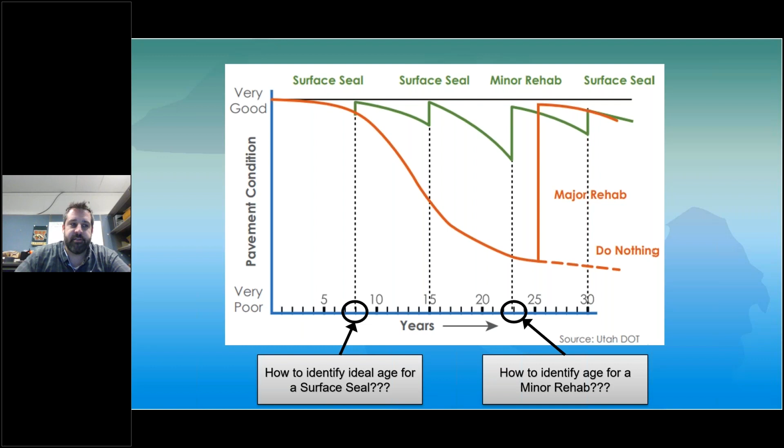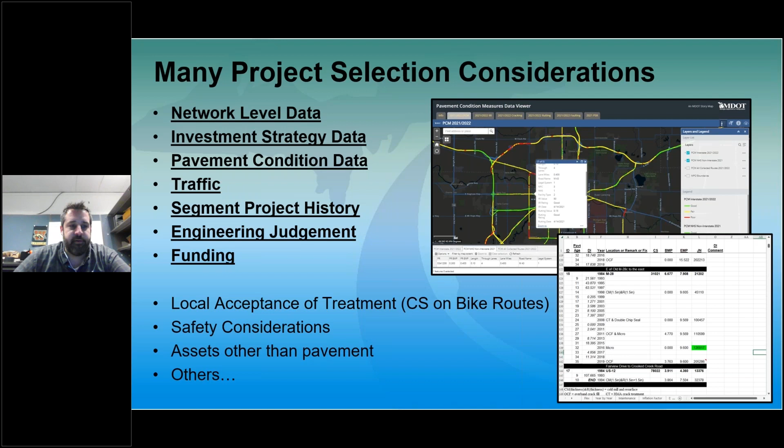So I wanted to start at a high level, where does MDOT use the data, and a breakdown on the steps that we utilize it in. The first level on top is the network level. We use a software called Road Quality Forecasting System, and that software helps us determine where our network is currently. We break it down with deterioration models and how the pavements perform and how they deteriorate. Currently we're doing a 1-year deterioration on our remaining service life, which I'll get into in a second. Then at the network level is where our program projects are, and kind of our strategies going forward. So that top level uses a lot of high level data.

And then the preventive maintenance program, where we're doing pavement seals and what we call functional enhancements, which is basically single course overlays or concrete patching, that type of work.

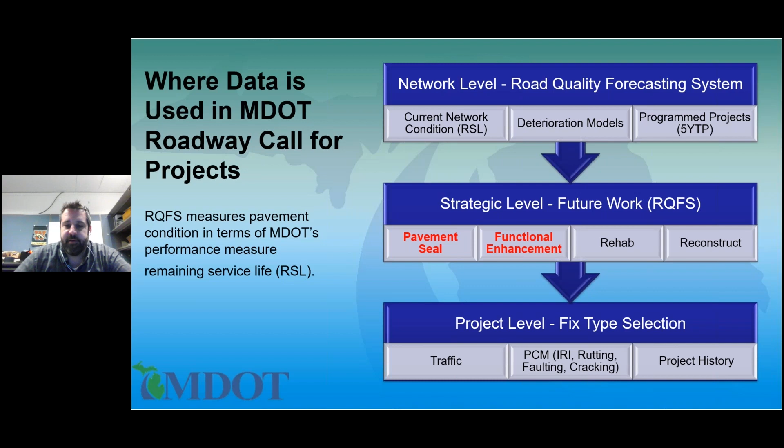So from there, the next rung of the data and where we use it is at the project level. That's where we're actually determining the fix, taking into consideration other data types too, such as traffic, PCM data, and project history.

Just to look at what we get from the network level data from our road quality forecast system, we basically get a look at our network at a high level, and good, fair, and poor roads, MDOT. So we utilize RSL for determining the status of our roads, whether they're good, fair, or poor.

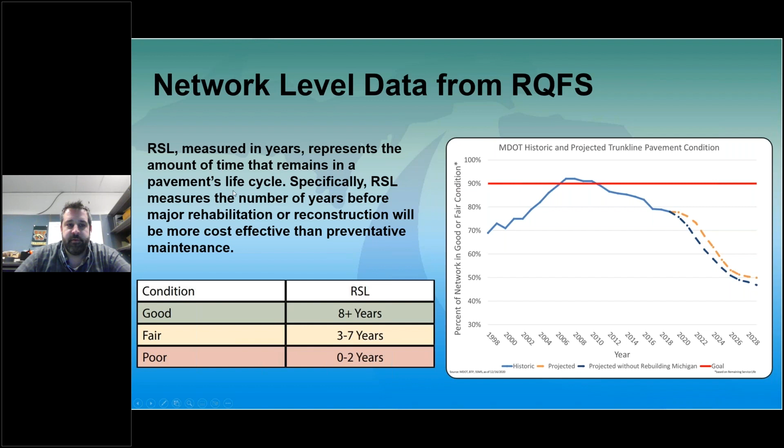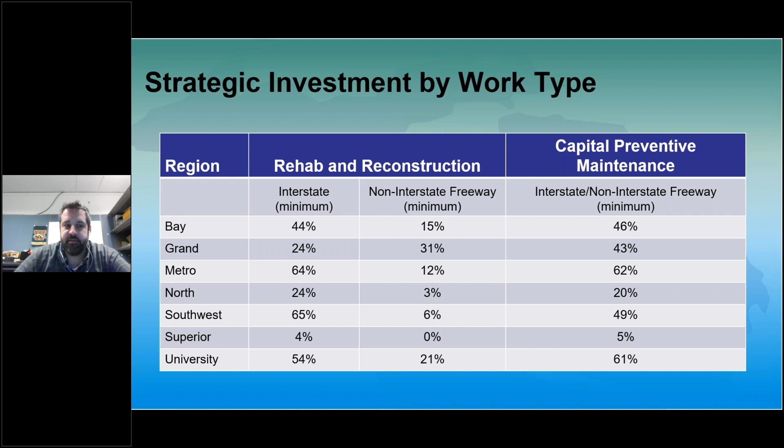The next level down was the strategic investment. So from RQFS, we determine strategies for investment type - how much money should we put from each of the templates into certain regions and roadway segments. It helps us break down where to focus the funds at a high level.

And then from there, the next strategic thing is to look at the individual templates. This is monies that are a breakdown of the budget for capital preventive maintenance, and we determine which category to focus our money towards: pavement sealing, functional enhancements, and some discretionary funds.

So we're trying to move the needle, so to speak, on the condition of the roadway by directing our regions to invest in certain work types.

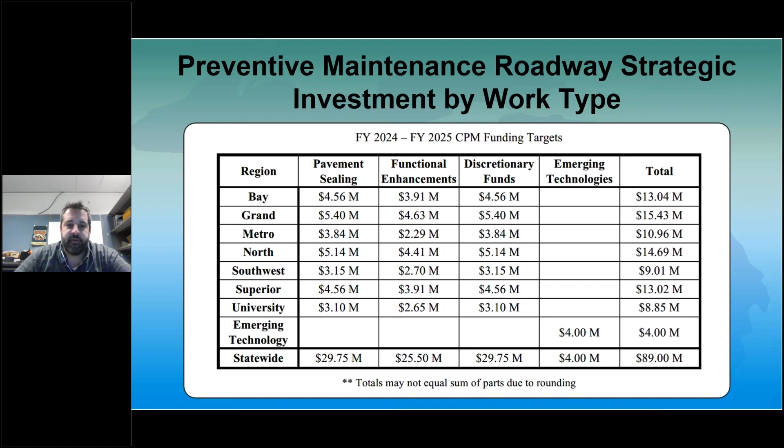At the project level, we're getting down to that low level, right at the job level, and that's determining the fix. So we have a CPM manual, MDOT - it's a really great manual. It goes into detail on all the fix types we utilize in the program.

Like I said, remaining service life is one of the big ones. Distress index, which is a sunset index that quantifies the level of surface distress that exists on a pavement section into a composite score, we utilize that. As of 2018, that is sunset, so we're developing a new index currently.

And we also use the standard PCM data: international roughness index, IRI, rut depth, and of course traffic data, project history, and a big data point, in my opinion, is engineering experience to determine project selection.

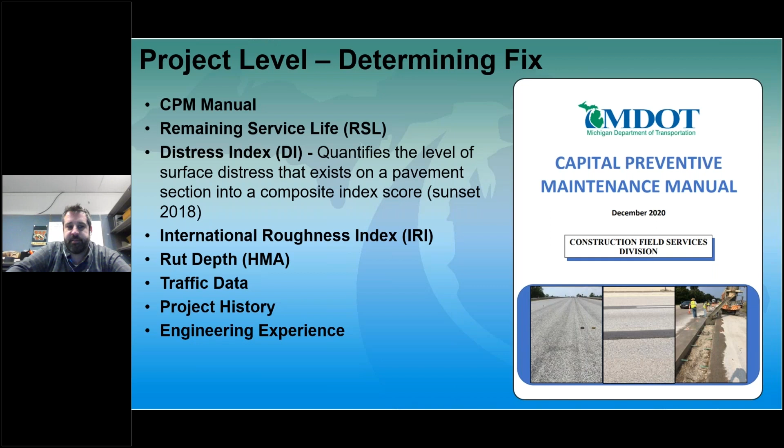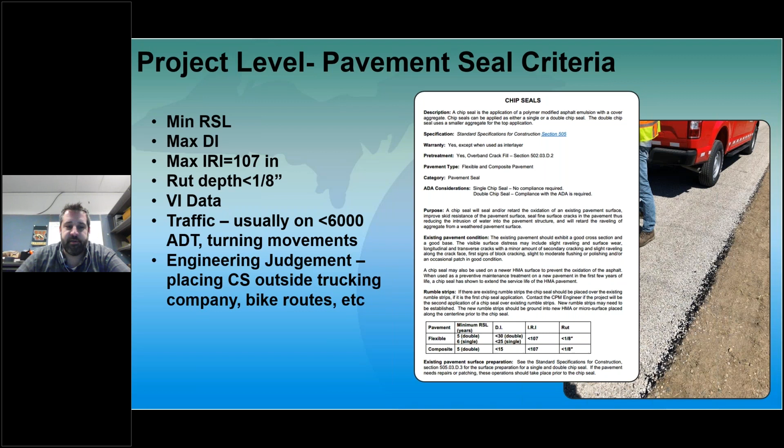There's also a lot of good write-ups in there on where we should focus it according to the ADT levels, turning movements, that types of things, and engineering judgment, of course - limited turning movements, things like that.

The next project level use of data example I wanted to give is crack seal. I think this is a good one for MDOT specifically. We currently do region-wide crack sealing contracts, and we proactively seal many lane miles of our pavement every year. The CPM manual gives a breakdown of when to use the rout and seal versus overband method.

Basically, you can use cracking data for that and VI. There's also crack density criteria that we use for selecting routes that get the crack sealing. And then basically we say you need a remaining service life of 10 years - let's not crack seal old, neglected roads that are going to get a reconstruction soon, to better invest our dollars. So, similar to the chip seal, but getting right down to the nitty gritty of data utilization.

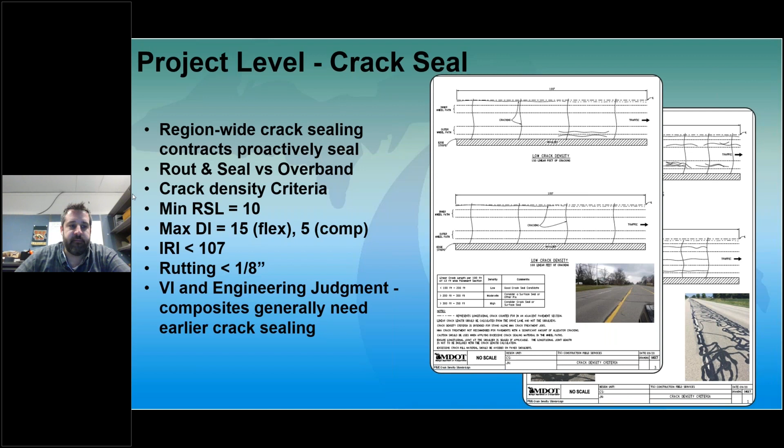And with that, that's all I have.

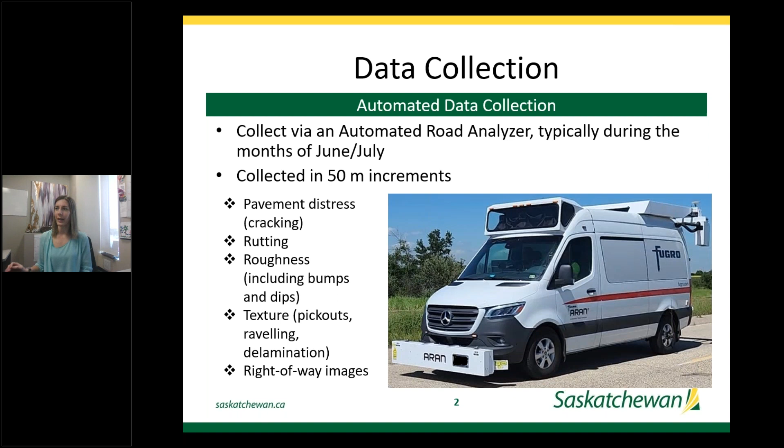Once we've collected all that data, it's time to start rolling it up into our pavement preservation program. We roll it up into 3 primary distresses. The first one is unique to Saskatchewan, we call it our surface condition indicator, or SCI, which basically looks at your crack density and severity and some of your pickouts. Then of course we have rutting, the maximum wheel path rut depth you might find on a road, and then our international roughness index, or IRI, to measure the ride quality.

When we're selecting projects, we look at all 3 of those, of course. We also look at traffic volumes, our maintenance costs, how the road's deteriorating, and then what budget we have and how much treatments are costing.

We have 3 different treatment programs that we spend money in. We have our light program, which is more of your chip seal coating or fog sealing, and those are triggered by SCI, so more based on cracking or pickouts. Medium program is more of your microsurfacing or your thin lift overlays, which are triggered by rutting. And then our heavy program, which is usually our resurfacing or rebuilding, primarily triggered by IRI, but it can be triggered by any of the 3 distresses.

We do have trigger points for each of the distresses for the good, fair, poor ratios. So depending on what treatment you're looking at, they have different treatment trigger points.

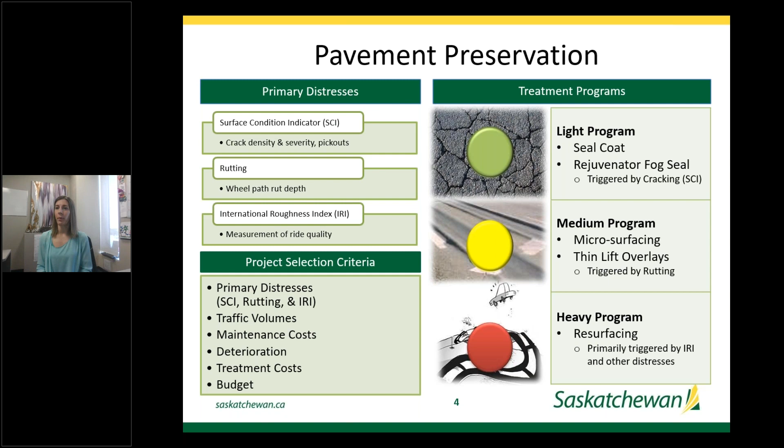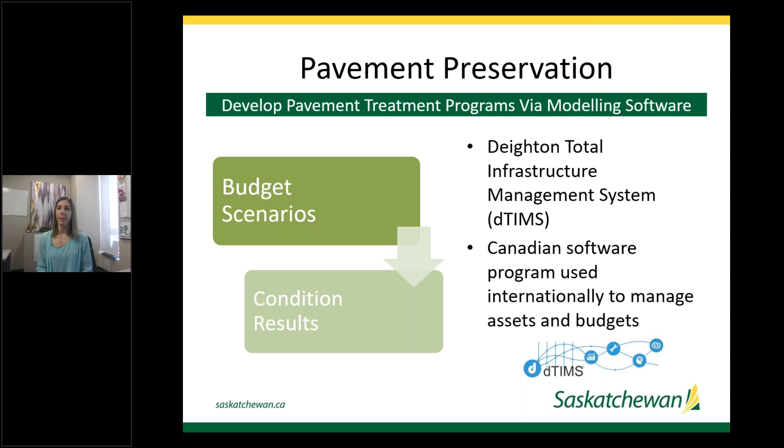To determine all of that, we actually use modeling software. Right now we're using Deighton Total Infrastructure Management System, or DTIMS, which is a Canadian software company that's actually used internationally to manage assets and budgets. Basically what you do is take your budget and say this is how much I have to spend in whichever category I have set up, and then it spits out a condition result and a construction program for me.

To go into that in a little more depth, you input all your information, your inventory, your traffic, all that great condition data that you just collected, how much treatments are costing, and your budget, of course. So you set up the model and what budget you want to look at.

Then the modeling software takes all that good data you just put in, and it optimizes based on the pavement condition index. That's something we've built internally here at the Ministry of Highways, and it looks at all your distresses, your cracking and your rutting primarily. We've built that based on our automated data collection. It's normally a visual assessment, but we've been trying to automate it just for this purpose, so it's something we've been working on lately.

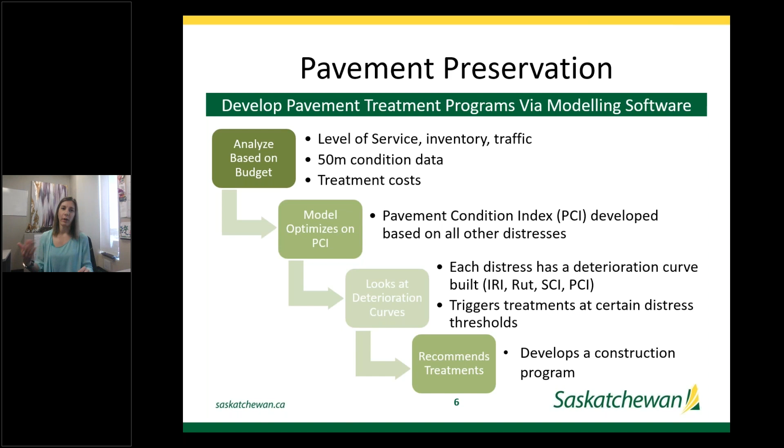Then it takes that optimization period that you've set up for your life cycle costing, and it looks at the deterioration curves for each of the different distresses. We've built some regression analysis for each of the distresses, IRI, rutting, and SCI, and then we've set up our different treatment trigger points. So as the network deteriorates in the model, it will trigger treatments and ultimately recommend a construction program. It will also show you how your network is deteriorating or improving based on that budget level and the treatments being triggered in the model, so you can analyze it in each of the different distress categories.

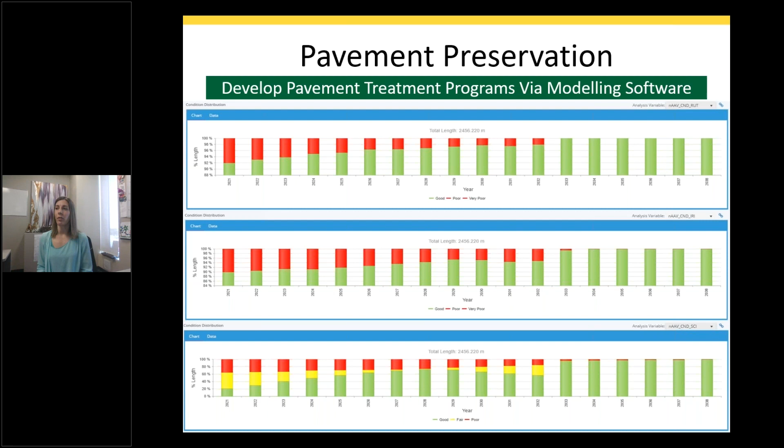So your rutting, your IRI, or your SCIs in this case. And then, as I mentioned, it does spit out a very comprehensive construction program telling you what year you should probably select a treatment, what treatment type, and where it should go.

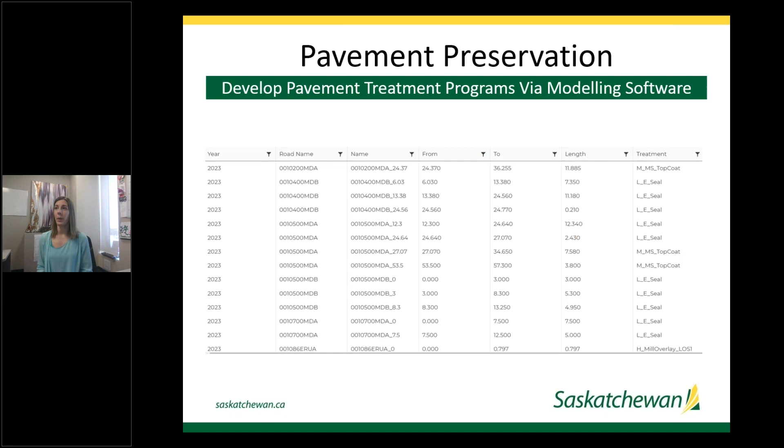You can adjust things as you go along, which of course you should do, and exercise some engineering judgment. So before we finalize our program, we do go out and verify things in the field to make sure that the modeling software is working correctly and that it's actually a treatment we would want to place in that location. And then we finalize our light, medium, and heavy programs based on the available budget.

We also have targets that we're trying to reach for each of our distresses on our different networks. So we compare what conditions are coming out with our targets, and maybe we just don't have enough funding to meet our targets, or maybe something needs to be adjusted in the model so we can better meet our targets. Depends on what the situation may be.

And once we've finalized our program, then we hand it over to our design group if something needs a design. And they also need condition data from us, so we do provide that to them, and that way they know how to design the road.

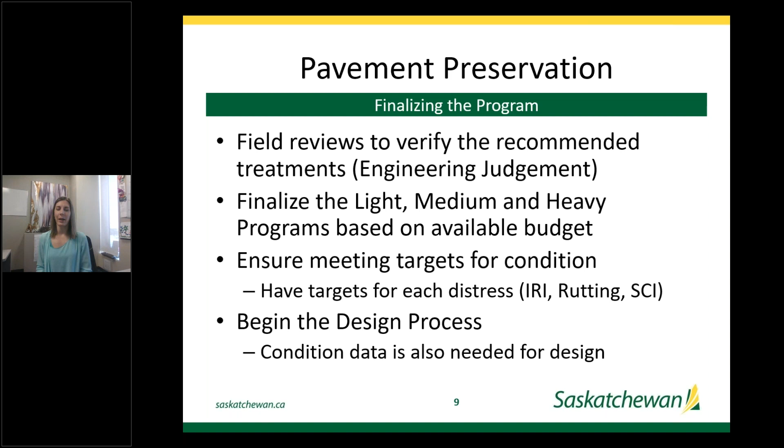It might be for something like rutting, the road needs to be designed for. Maybe they need to add something to address cracking, like rubber or fiber, to their design. So we do provide that to them to aid in their process as well.

As I mentioned, we do collect right-of-way imagery, and some of the future uses that we're looking into, and some folks in our ministry are getting interested in, is leveraging those right-of-way images to collect other assets. So things like light standards, power poles, signs, or line markings, because we are driving down the road and we see all these things. So you can build algorithms to flag some of these objects, but a lot of it right now is very manual to go through and assess.

So it may not be the most practical thing yet, but I think as time goes on and the technology advances, it's a possible additional data collection point that we can get.

So that's my presentation for now. I guess if there's any questions, we'll discuss them after the next presentation.

Good morning, everybody. My name is Chris Kuffner. I am with Hennepin County in Minnesota. I'm the Asset Management Division Manager. I've been with the county about 1.5 years and was asked to give the local perspective of a county in Minnesota and how we're using our asset management and pavement data, how we make decisions with our pavement preservation program. Prior to that, I had a 25-year career with the Minnesota Department of Transportation, and the most relevant position there was district pavement and materials engineer, responsible for the pavement management program in that particular district. So I'm going to talk a little bit about the Hennepin County Pavement Preservation Program and how we utilize the data.

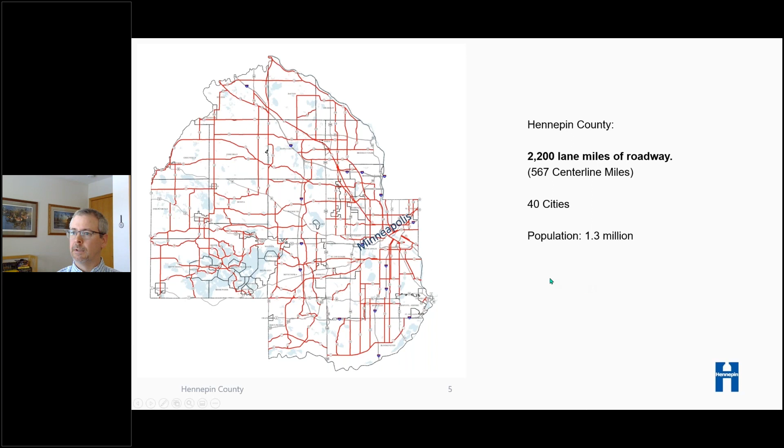So definitely some challenges in managing a program. And there are 87 counties in Minnesota, so this presentation probably isn't representative of all of them, as Hennepin County is the largest. And while any agency will say they don't have enough funding, Hennepin County has pretty good funding, in that we are able to afford and invest in our own data collection equipment.

And so we have our own profile equipment, and we run our roads every year. Of course, this is based off the International Roughness Index, but then that's a calculation to what's called a pavement surface rating, which has a 0 to 5 rating. This coincides with how the Minnesota DOT reports their smoothness as well, so we're somewhat apples to apples. Anything above 3 is going to be good, anything below 2 is going to be poor.

But then we also do a pavement condition index, where we have staff that go out and visually inspect all of those cracks and distresses, and ultimately plug that information into a program that results in a pavement condition index ranking from 0 to 100.

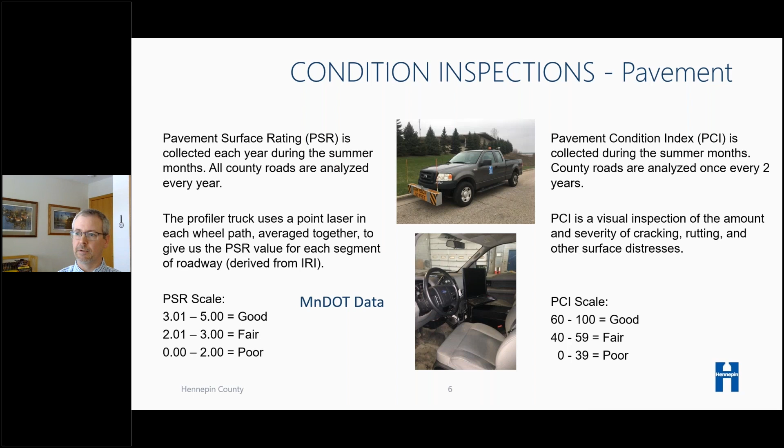For several years, the Minnesota DOT has been providing pavement data via their pavement management vans to all the counties in Minnesota, and they run that every other year. I'll show you in a bit, Hennepin County hasn't historically been using that, but I'm exploring ways to reduce redundancy and utilize similar information, and maybe improve safety for our staff that's been out there collecting it.

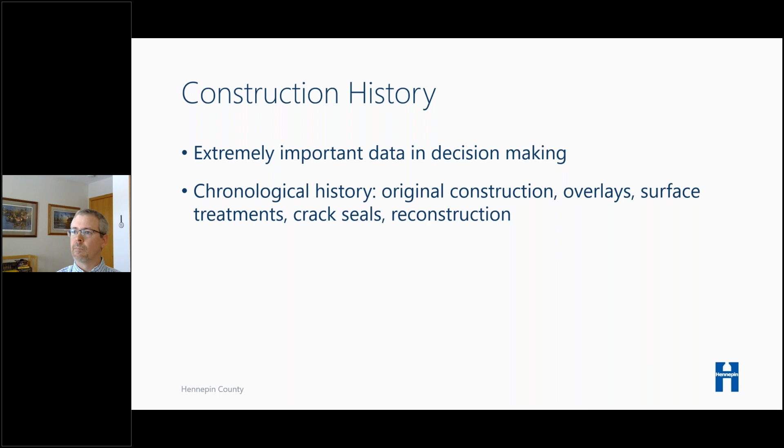Other data, like the other two I've mentioned, I think construction history is very important when considering your preservation program. It's one thing if you've built a new road, how you're going to treat that for pavement preservation, but if it's an older road with multiple overlays, you may have a different strategy. So we have all that history dating back to original construction and subsequent overlays, surface treatments, and up to including reconstruction.

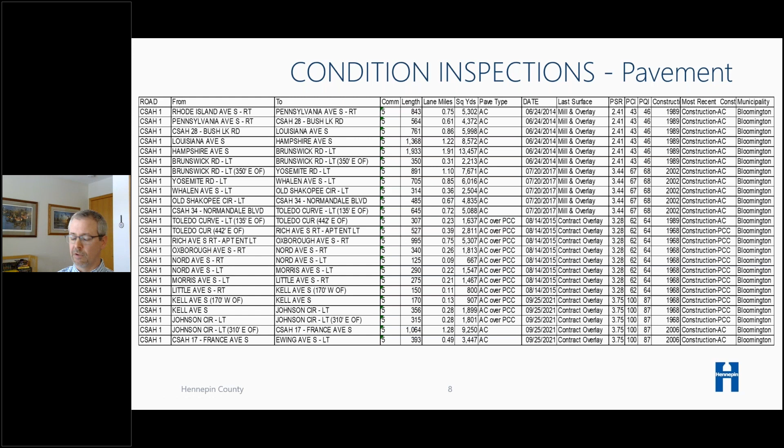One of the main problems for us right now is it's the same road, but the segments don't align—they're not the same start and stop point. And we're not tied to a linear referencing system quite yet. So we're trying to get into the 21st century on some of our data.

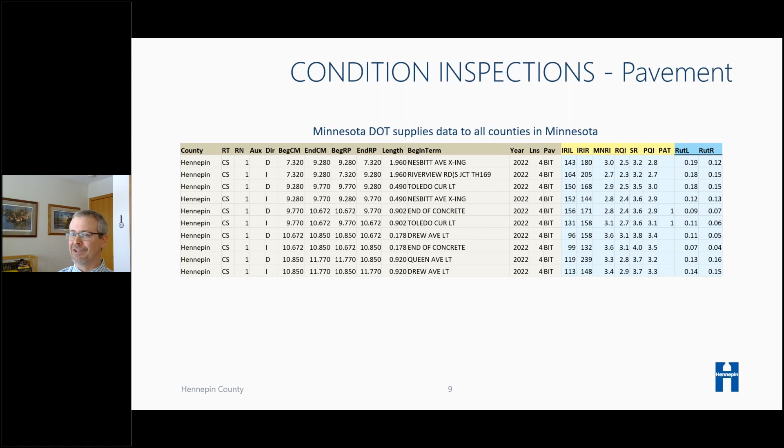So how are we using all of this pavement data? Well, obviously, I mentioned before, nobody has all the money they want, so we're trying to optimize every dollar we have available. We're not currently using a pavement management or modeling software. We have an older one available to us, but we haven't had the expertise nor the time to dedicate to that as of yet.

But of course, we're using this data in all facets of our program—our capital program of reconstruction and pavement rehab, and all the way to our preservation program of overlays, preventive maintenance, chip seals, and things like that. And we use the data slightly different—I'll be getting into that.

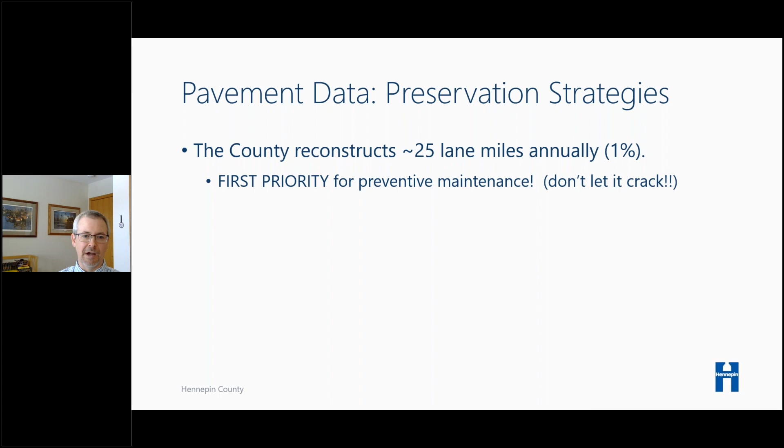I mentioned I had a long career at MnDOT working with pavement management and our overlay programs there as well. And we tried a lot of different strategies to try to stop reflective thermal cracking. As far as I recall, we put 2 lifts of stone matrix asphalt on a cracked pavement, and those cracks reflected through in 3 years. So I came up with my mindset that the best treatment for a crack is to never let it happen in the first place. So let's try to keep that asphalt binder as flexible as possible in those first few years. And of course, we want to keep those good roads good.

So how we use the data, we'll actually filter the data, and currently we're using spreadsheets for this. All that data gets exported to the spreadsheets, and we'll filter on, hey, tell me what roads have been reconstructed or rehabbed in the last 10 years. We did that recently, and that was 258 lane miles out of our 2,200. And we'll compare that to filtering the condition data, our ride quality data above 3.0, which is good, still in good condition, same with the pavement condition index, and you can see some lane miles there. And then we'll compare that to the construction history, and whether there's anything in the proposed capital program.

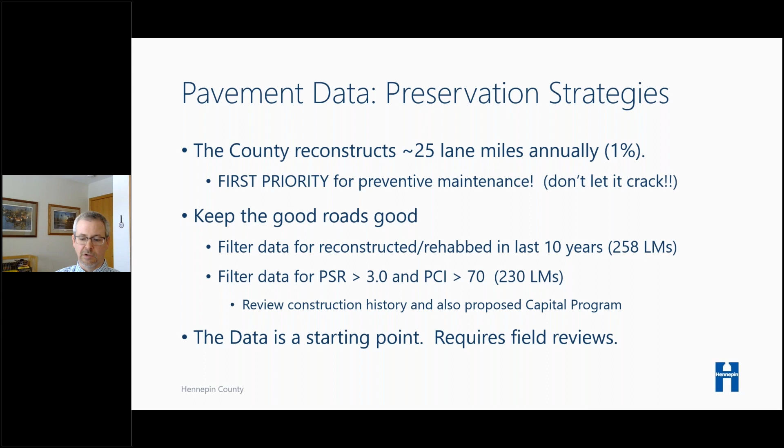And I'll reemphasize the point here that both Tyler and Allison stated as well, that we agree the data is a starting point. We use that to generate our lists, and then we do field reviews and engineering judgment as well to make those good decisions. Just to touch base on more of the life cycle decision-making process on new bituminous pavement.

I saw in Allison's presentation talking about rejuvenators. There's been a lot of research at Minnesota DOT and their partnerships, and we're excited about the opportunities with rejuvenators. We've just started to dabble with them. But if I could tell you our ideal strategy for a new bituminous pavement right now, it would be to put a rejuvenator on early in its life, and then a couple of well-timed chip seals and crack seal throughout as those cracks appear. And then hopefully the first overlay can be held off till year 25 or later.

One thing I'll mention there, we have a lot of debate here in the whole asset management realm, as we're expending significant funds on durable pavement markings and monitoring the nighttime retroreflectivity.

So while we might be able to argue someday that putting a chip seal on in year 1 or year 2 is the ideal time, we're weighing that cost and whether or not we have to remove or impact the retroreflectivity of those markings. So our current thought is let's put a rejuvenator on early in the life, protect those markings, and then the opportune time to put the first chip seal on might be at the same time when those pavement markings need to be refreshed as well.

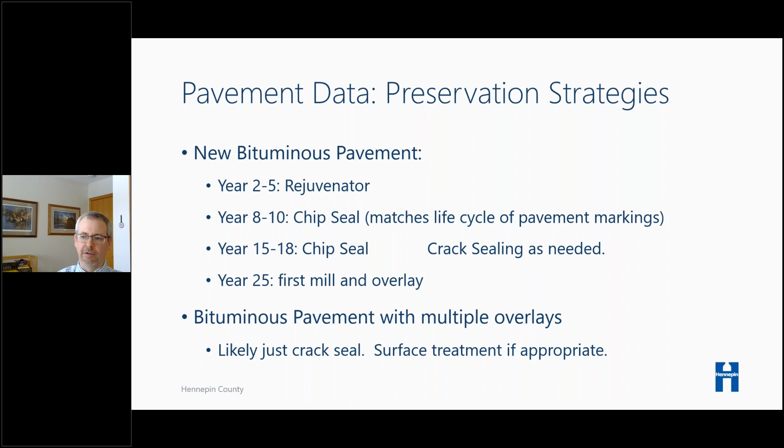And then to the far other extreme, we have 80 and 90-year-old asphalt pavements that have been overlaid 5 times. We may not have much of a preservation mindset on those other than to crack seal them and then the surface treatment if it's appropriate.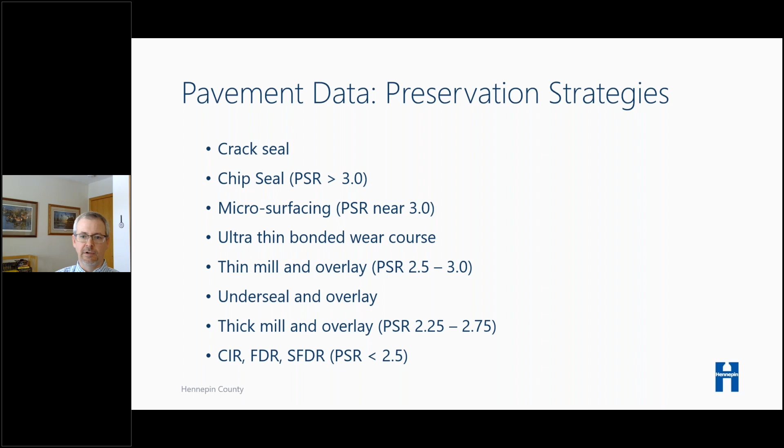And then here's just my last slide, a few strategies that we are employing here at Hennepin County. About 7-8 years ago, there were really 2 strategies, reconstruction and overlay. And as we've used pavement data and a more open mindset, you can see we've been bringing a lot of tools into the toolbox and some of the different criteria that we use and trigger points for those treatments. So with that, I will wrap up as well.